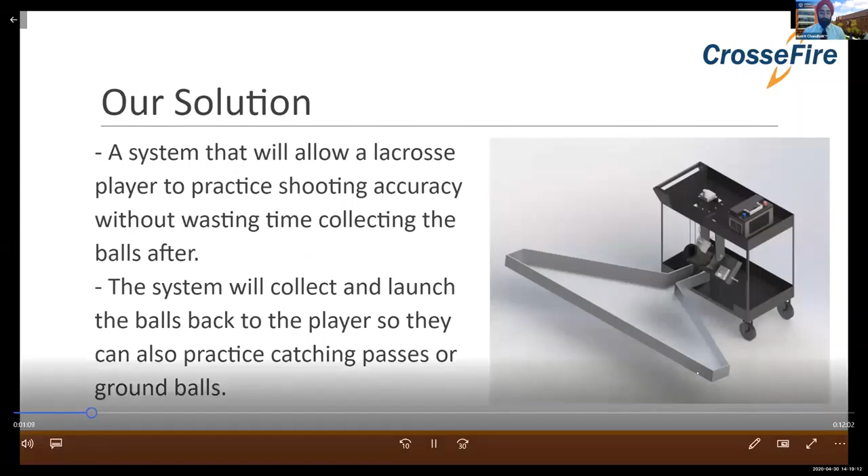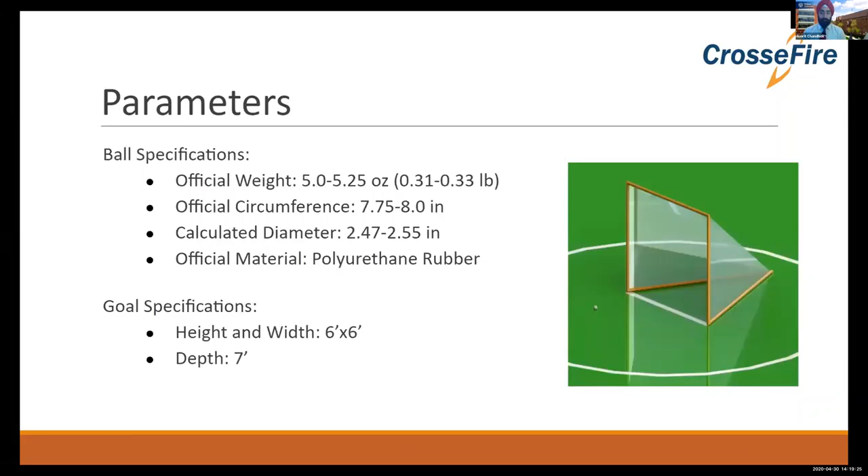This system allows players to work on their shooting accuracy and to work on receiving passes while going to goal at a game-like speed. The basic system consists of 4 main parts: target screen, collection basin, a transport system, and a launcher that sends the ball back to the player. So, in order to design this system, we had to take into account some parameters, including regulation ball and goal size.

So in order to begin designing the system, we had to first outline the requirements that we wanted the system to fulfill. We wanted the system to act as a target for the player to be able to shoot at and practice their accuracy. We also wanted the system to collect the balls and transport them from the collection area to a launching mechanism to actually launch the balls back to the player.

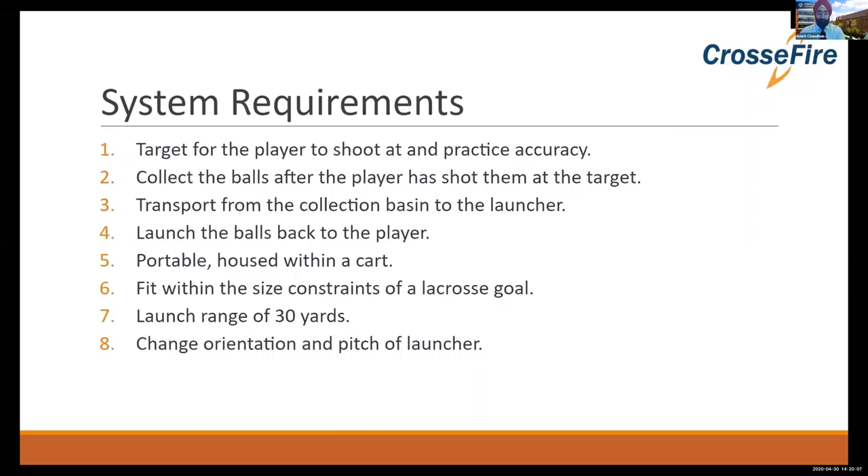We wanted the system to be portable and housed within a cart, so it was easy for the player to transport it. We also wanted the system to fit within the size constraints of a lacrosse goal and launch a maximum range of 30 yards. We also wanted to be able to change the orientation and pitch angles of the launcher. So once we were able to outline the requirements of the system, we were able to fill in the specifics.

So physically, we wanted the target screen to be made of a shock absorbing material. We wanted this material to absorb the impact of the ball hitting it, so the ball would drop straight down into the collection basin. The collection basin would collect and funnel the balls into one concentrated area and eventually lead the balls to the transportation system.

For the transportation system, we utilized an Archimedes screw with guide rails to lift the ball up and eventually transport it to the launching mechanism. For the launching mechanism, we used 2 parallel extension springs with a quick release system, and also we wanted the cart to be portable to make it easy to transport the system to a lacrosse field.

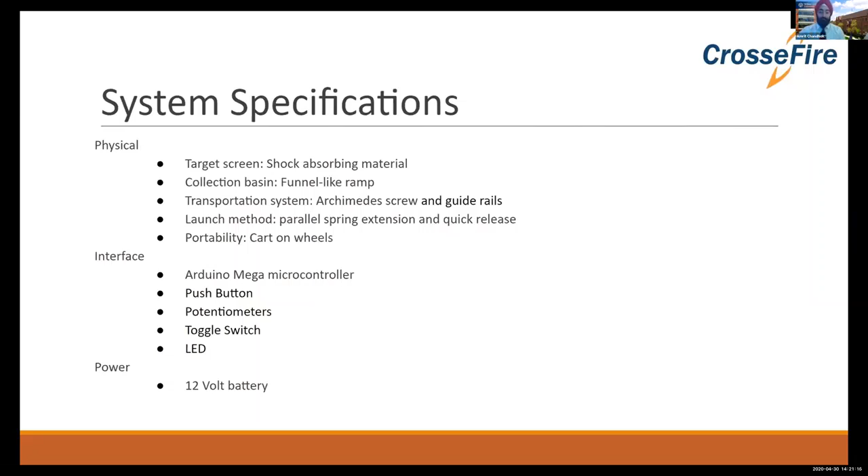For the electronic interface, we wanted to utilize an Arduino microcontroller. In this case, we're using a Mega because it has more ports for inputs and outputs. Also, we're utilizing a push button, potentiometers, toggle switch, and LEDs. To power the whole system, we are using a 12-volt battery to maintain portability.

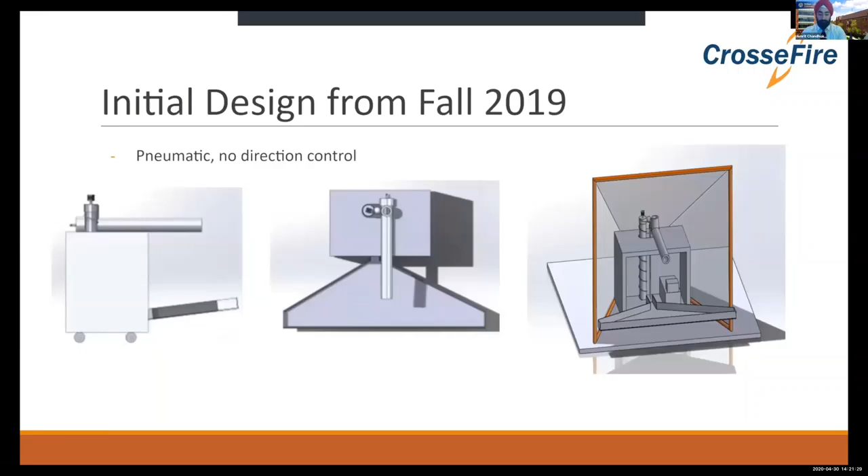So this is the initial design from last semester. At this time, we were using a pneumatic system to launch the ball, and the barrel had no direction control. Since last semester, we decided to make a number of design changes. For the collection system, the general design remained the same, but we added a kickstand to help balance the weight of the basin.

The screw for the transport system was bulky and was originally going to be made out of PVC and copper tubing. For the launch system, as I mentioned previously, it was originally designed to be pneumatic, but due to safety concerns that were presented to us, we decided to move in a new direction, that direction being spring propulsion.

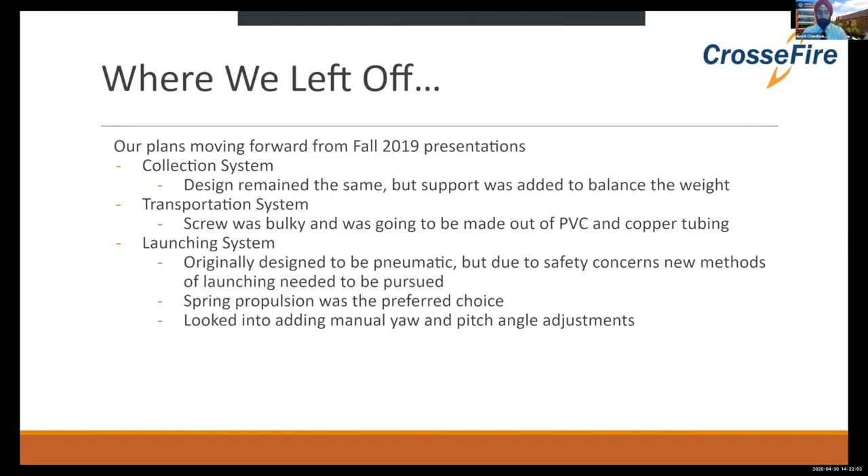Additionally, we also looked into adding manual yaw and pitch angle adjustments. And this is our finalized design. The first step in the collection system is the target screen, which is made of a 2-inch thick multi-purpose foam. And the purpose of this part is to be able to absorb the energy from the ball's impact.

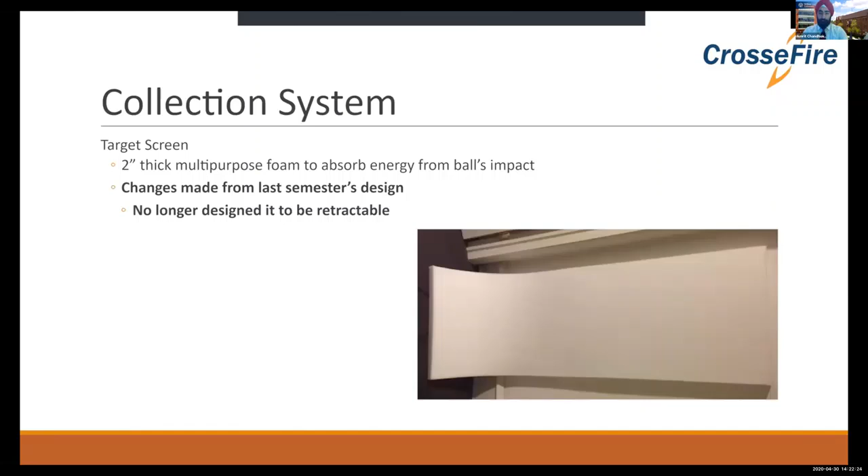The main change that we made for this design from last semester is that the screen is no longer retractable, but instead is fixed in place. After coming into contact with the target screen, the ball will then drop into the collection basin, which is a slanted part that serves the purpose of moving the balls to the transport system.

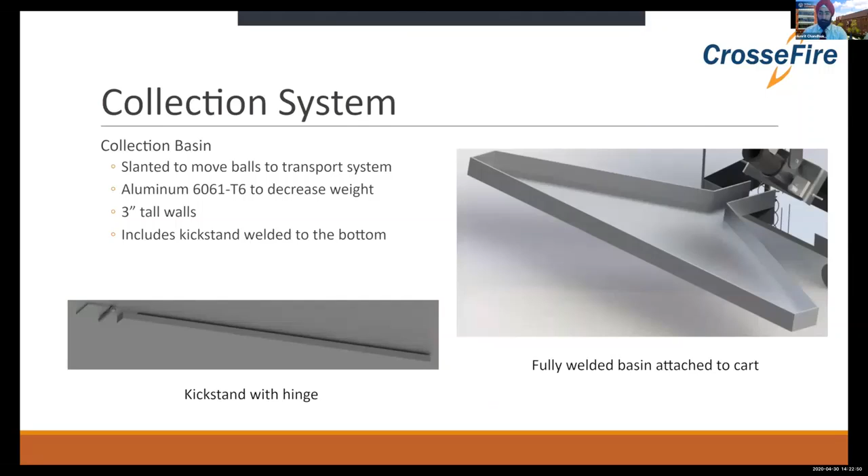This part is made of aluminum 6061-T6 and features 3-inch tall walls to prevent the ball from falling out. The system includes a kickstand welded to the bottom as a way to balance the weight and support the basin. From the collection basin, the ball moves to the transport system, of which the first step is an Archimedes screw.

The original design we had for the Archimedes screw was going to be a PVC drive shaft and copper tubing, but that was too bulky of a design and we wanted to slim it down. So we decided to use steel instead, and it could be easily welded and attaches directly to the motor. On the other end of the drive shaft is a ball bearing that allows it to spin freely.

In terms of the motor, we intended on using a stepper motor, but after testing, we noticed that the motor was slipping, both at high and low frequencies, so we determined that we needed higher torque, so we switched to a 12-volt geared DC motor.

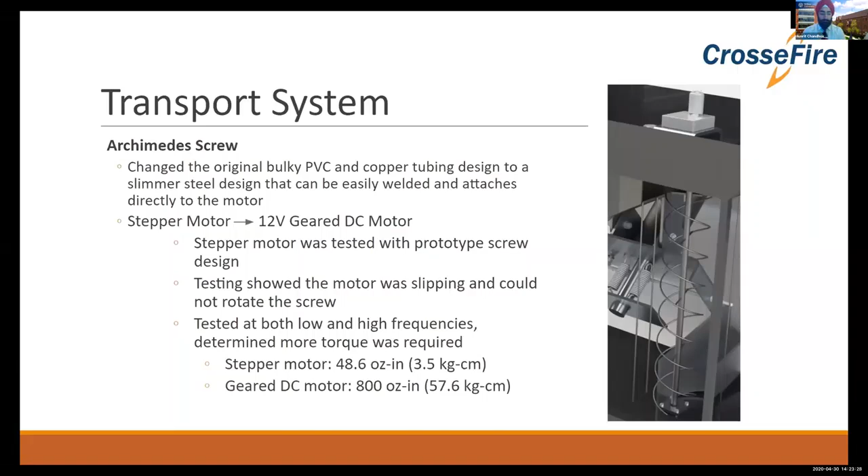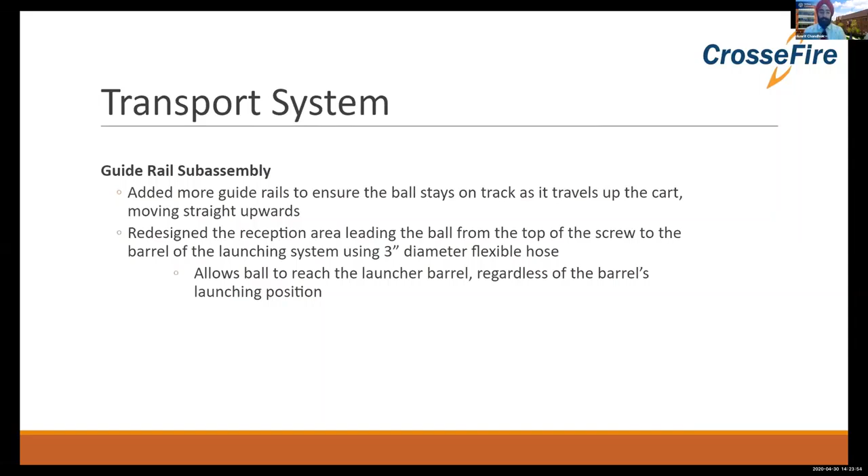Along with the Archimedes screw, we decided to add a guide rail subassembly to help the ball move straight up to the top of the cart so that it can actually access the launching system barrel. To do this, we used steel dowels welded to another steel part we called the reception area, which houses the ball at the top of the cart and is connected to the launching system barrel by a flexible 3-inch diameter hose. So once the ball goes through the transport system, it will lead into the launching system.

Initially, the launching system was comprised of a pneumatic compressed air launching method. We did have some challenges with this method. There were some safety concerns, so we had to make a decision to pursue other options. So after careful consideration, we chose an alternative launching method, springs. We chose springs because it is much easier to analyze, much easier to test, and also much safer compared to the pneumatic compressed air method.

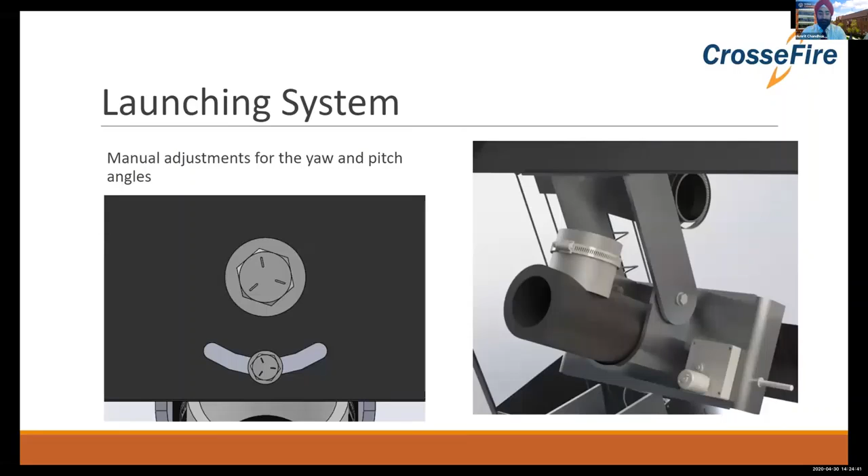After choosing the propulsion method, we also decided to customize the workout for the player. In order to do this, we implemented manual adjustments for the yaw and pitch angles so they could practice receiving passes at different areas on the field. We noticed from our testing that we got our best results for launch range when we had a quicker release. In order to implement this into our system, we decided on a slip gear concept.

This is commonly used in VEX robotics, and it is a gear that you grind some of the teeth off. In this case, we have that gear meshing with a rack gear cut into the plunger rod. As the plunger rod extends backward, those teeth will mesh. And when it extends all the way, the smooth surface of the gear will be against the smooth surface of the plunger rod. When that happens, the plunger rod will be able to move forward, and it will be able to use the force from the spring to propel the ball forward.

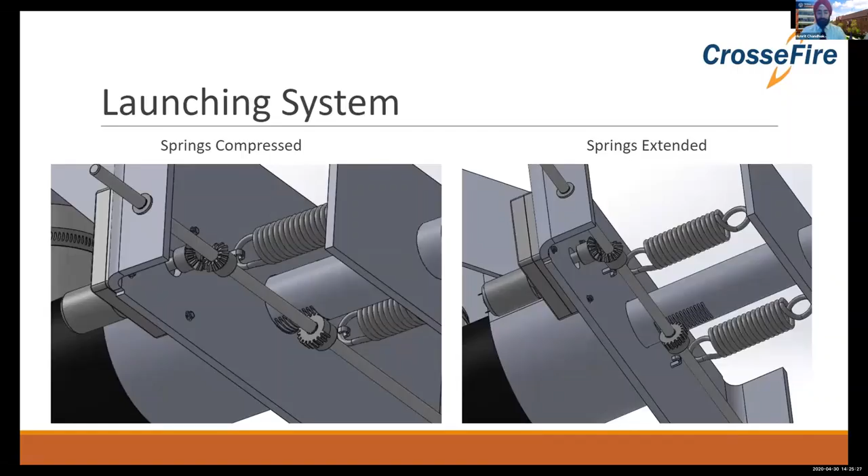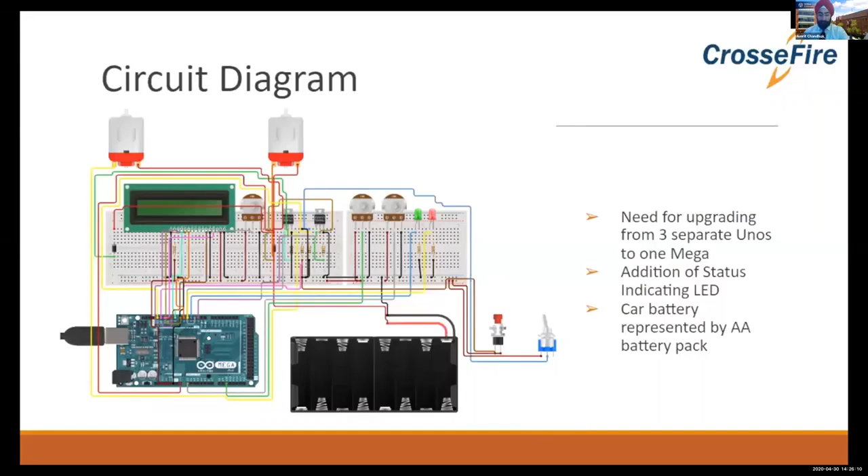And so the new system, which was designed here, has status indicating LEDs to show whether the system is idle or if it's currently running. These 2 potentiometers allow the user to adjust the firing frequency and firing distance. The LCD display is a 16x2, which allows the user to read the set values from the potentiometers.

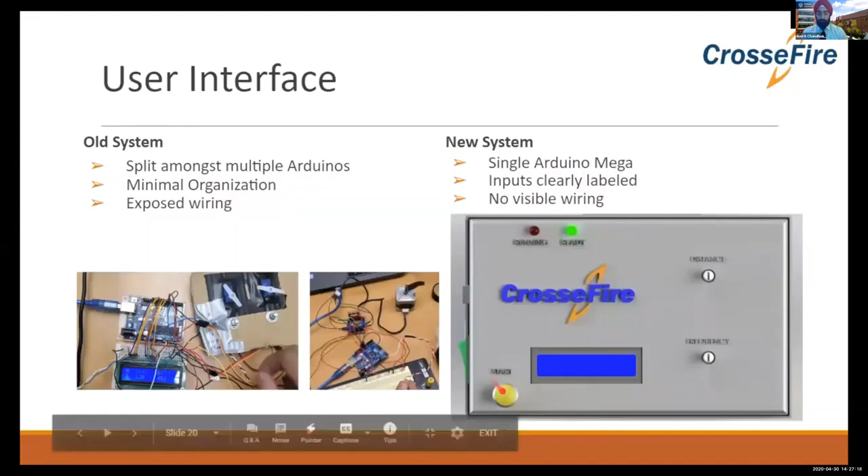This component on the left side is the power switch. These ports over here are where the power supply and the USB cable are attached for programming the Arduino. And this is the start button for the system.

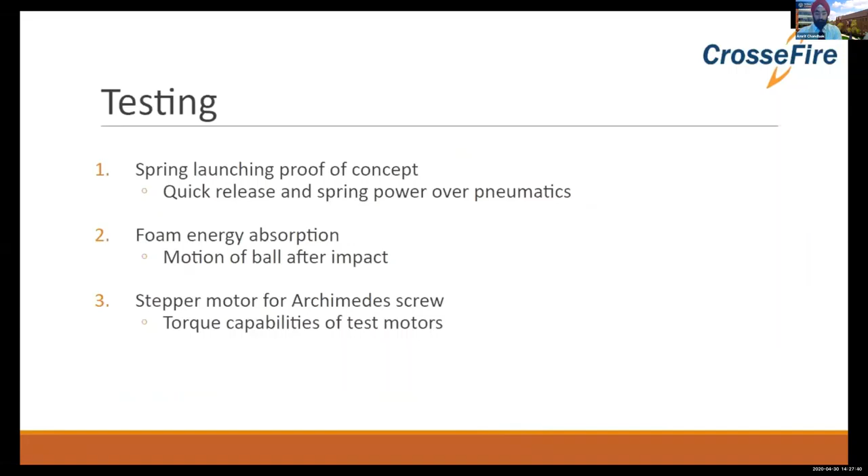Our team conducted several different tests to prove that our device was able to accomplish our set goals. We did a test for the spring launching mechanism, a test for the foam energy absorption, and we did another test for the stepper motor for the Archimedes screw to prove that it was able to lift a ball or not. Our team conducted a spring launch test.

We also conducted a test for the foam material for the screen mechanism. This test was to prove two things: that the material was durable enough and to test what required tension would be needed for the foam mechanism. We observed that as the foam material was under greater tension, the ball would bounce off of it, and when the foam was relaxed, then the ball would drop straight down.

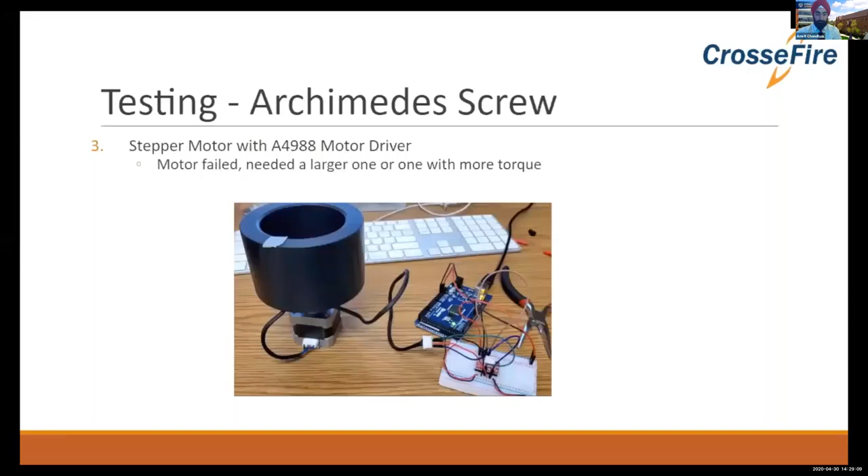We also conducted testing for the stepper motor to see if it was sufficient enough to provide the torque necessary to rotate the screw mechanism. The first motor driver we had was significantly overheating, so we had to switch to another stepper motor driver, the A4988. We found that the motor was insufficient in its torque capacity, so we had to look for motors that were able to provide a lot greater torque.

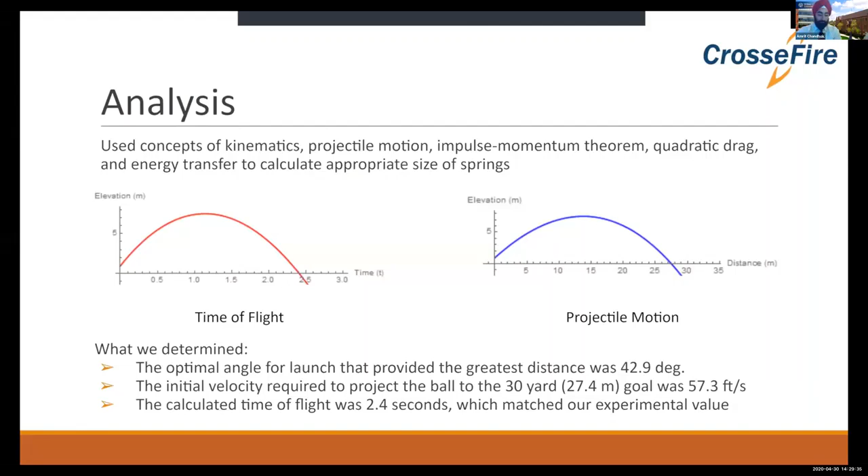In order to approximate the size of the springs, we performed kinematic and projectile motion analysis. From that, we were able to determine a number of different variables, including the optimal angle for launch, which was 42.9 degrees, the initial velocity of 57.3 feet per second, and the calculated time of flight of 2.4 seconds, which matched our experimental value.

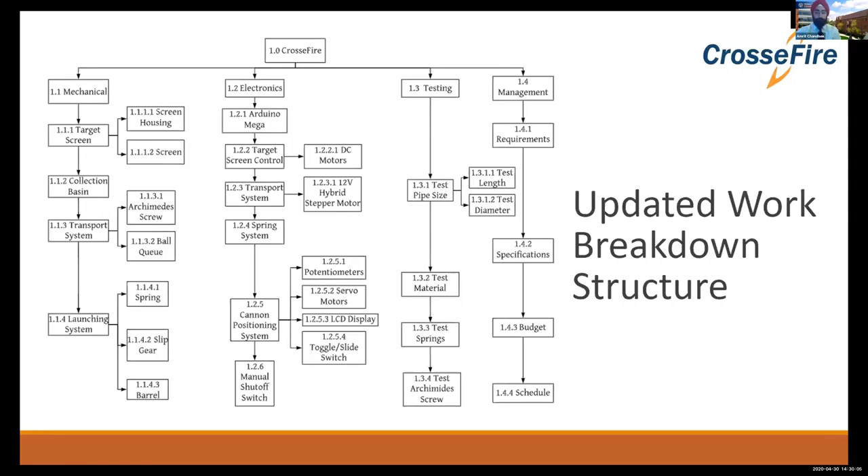So after finding all the components and materials that were needed for the prototype, our total cost would be $449.37. There were $526.66 in materials that were either donated or bought out of pocket. Our total budget that we had from the university was $500, which left us with a remaining budget of $50.63. This is the work breakdown structure, which is composed of mechanical, electronics, testing, and management.

Some of the biggest challenges we faced when designing the CrossFire were changing our launch mechanism from a pneumatic powered to a spring powered system, designing a quick release mechanism to release the tension on the spring, determining correct sizes for the spring as well as the motors, and finally the global pandemic, which affected every team. This prevented us from finishing our physical build.

In conclusion, we created a device which was able to help lacrosse players increase their efficiency while training. The design was fully completed and we tested small scale to prove conceptual parts of the mechanisms. We used engineering formulas and concepts to analyze and find correct sizes for the components. We used our best judgment to select materials that would withstand the environment which the CrossFire would be used in.

And as part of our design intent, we also made sure to minimize our costs and make sure that the user was safe.

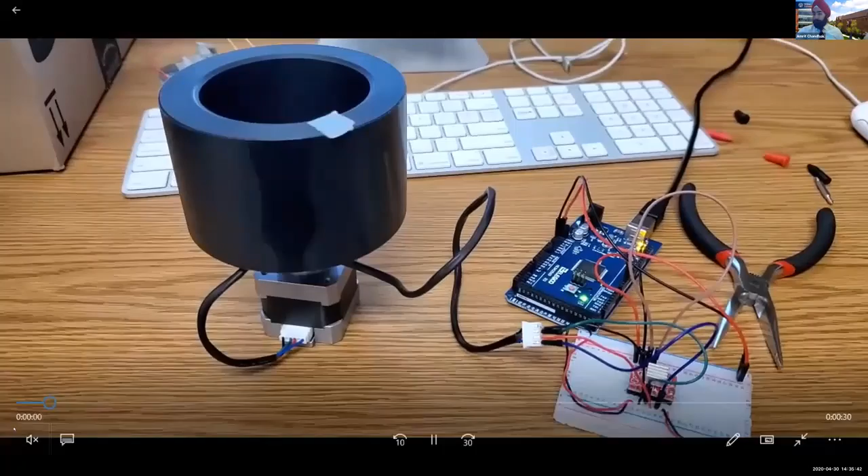So this is the initial hub that we were going to use to connect to the actual screw, but there was no torque in that system. So if I slightly bumped it, then it would basically just start slipping. So this is why we chose to pursue the geared motor method. So that's this clip. And this was using the updated motor drivers because, as we mentioned previously, the other motor drivers were significantly overheating. So that's that clip, and then one more for the foam testing.

Yeah, the foam testing was interesting because we held it at different tensions. Some of them we had a little looser, some of them a little tighter, and we got some interesting results from that. Yeah, that was it. We had several clips, but just as a concept.

Okay. Well done, team. Great job. Thank you. Thank you. Okay, I see clapping.